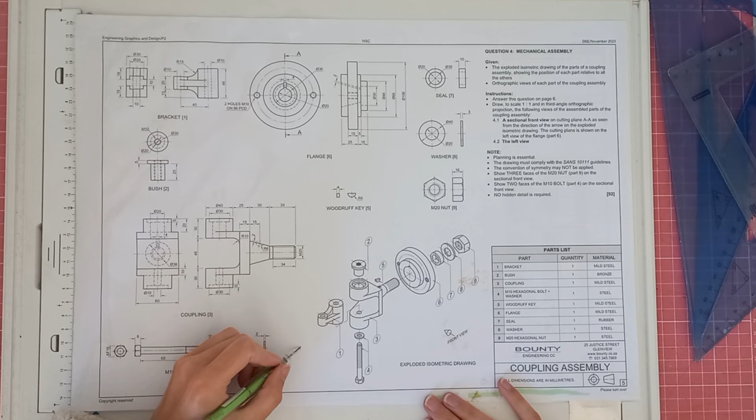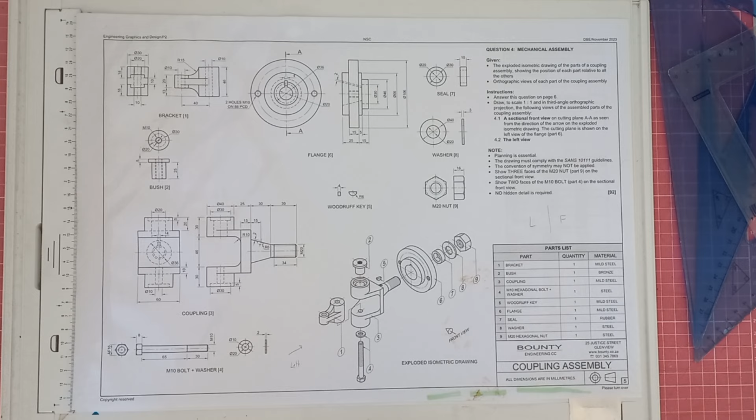And when we draw that on our paper, we're going to have the front and the left on the side over here. So let's just have a look. See, there's quite a lot going on. I'm just trying to think if it would be easier to start by drawing the left view so we get that bit in, and then we can draw in the rest, which I think is going to be the most sensible. Okay, we're going to start by drawing in the left view.

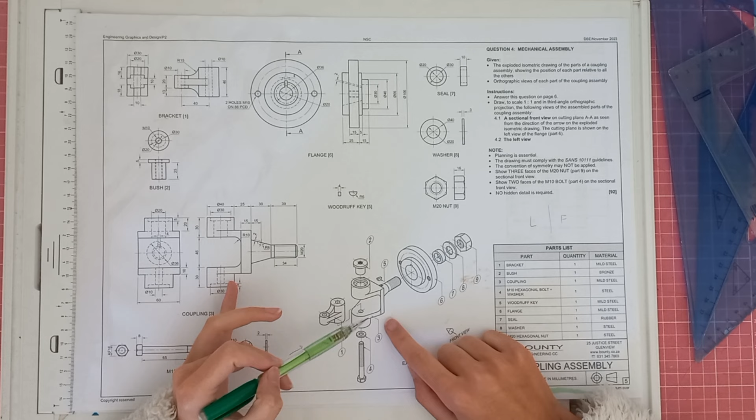So first things first, we can see that you won't see a lot of what's going on behind the left view. For instance, you will not see this nut, this washer, this seal; you will see part of this here; you will not see the key or this thread here, but you will see what's in front here and what's on top over here. Actually, it slides right in, so you won't see that, you'll just see this here. You will see part of this here, which is the bolt and washer. You won't see the washer though, and you will see the bracket.

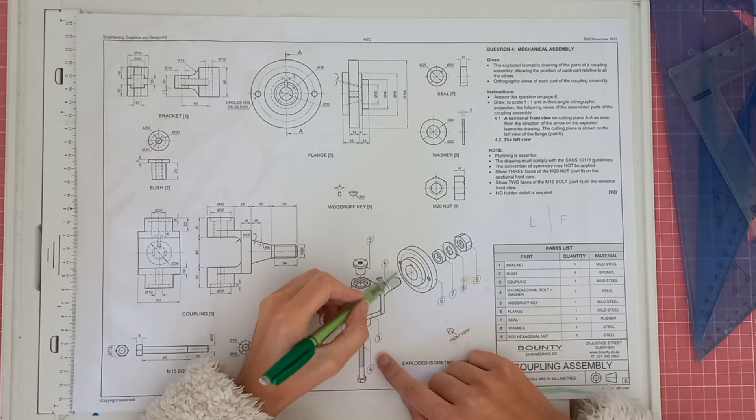Okay, so let's get started. We're going to start off by just drawing an outline for the circle here so that we know how big it's going to be. Because we know our left view is going to have to be on the left side of the paper, apologies, I've messed on my paper so it's a bit crinkled. We're going to just start by drawing in our center lines.

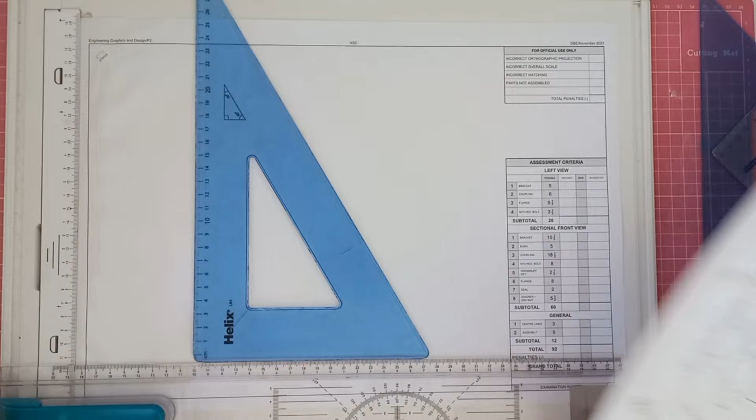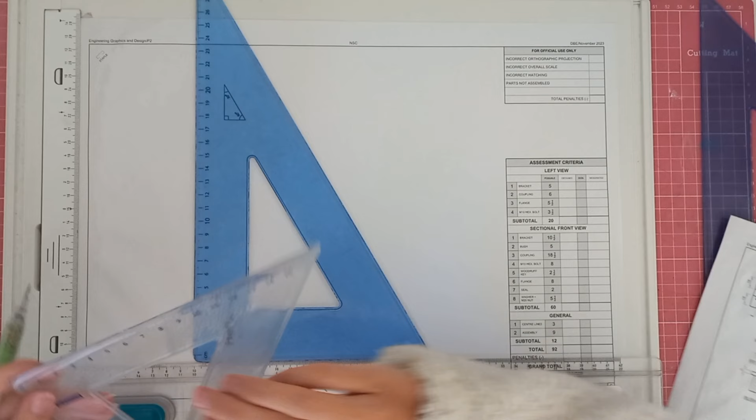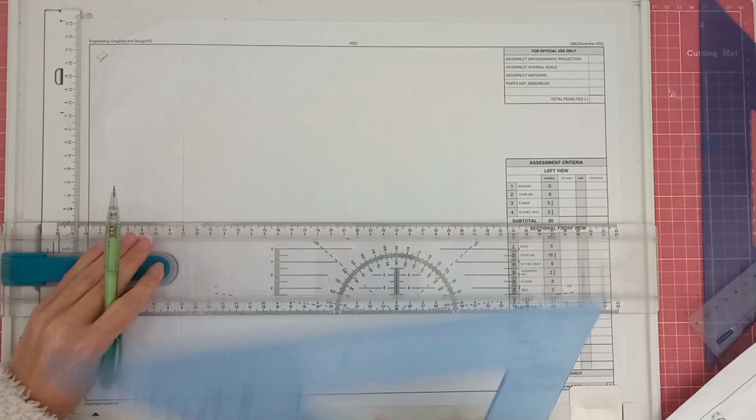I don't imagine that it's going to be too big, because if you're looking at the circle here, the diameter is 106. So if we take half of 106, that's 53. So we're going to leave about enough space for 53 to work. We could essentially start here even. The reason we're doing this is to plan our paper, to make sure that we do not have cramped drawings, otherwise you're going to have to restart your whole mechanical assembly, and that's not always a good thing.

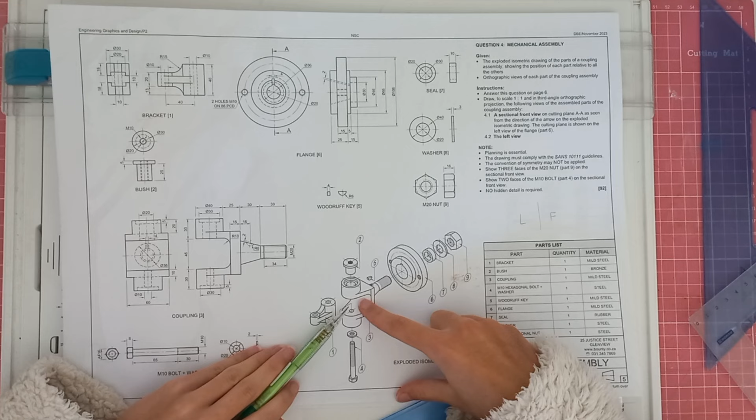So we're going to just start off by drawing that, and then we can get cracking on the rest. We're going to start with this bit here, which we can see slides in the center of this here. We will obviously see part of it on top here, so it's going to slide into this area here.

Sorry guys if I'm just a little bit not making sense. It will make sense. I'm also just trying to get this into my brain.

Okay, so we're going to draw it in here first. We're going to find the center point, which we can see would be right in the middle here, and we're basically going to draw this.

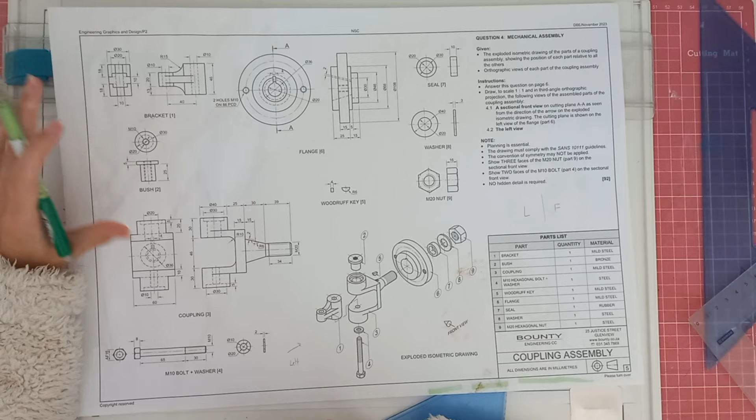We obviously do not have to cut this view, which is a nice thing. So we're going to start off with our diameter of 30, which will give us 15 and 15 on either side, and we'll have a line here, as well as a line over here.

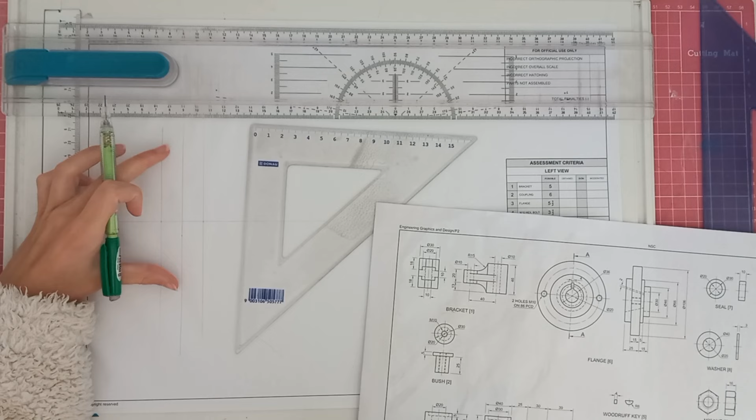Okay, then we will have the total height of it, which will be 46. So that would be, because it goes in the middle, it will be 23, 23. 23, 46. Perfect. Okay, then we've got a line there, followed by a line here.

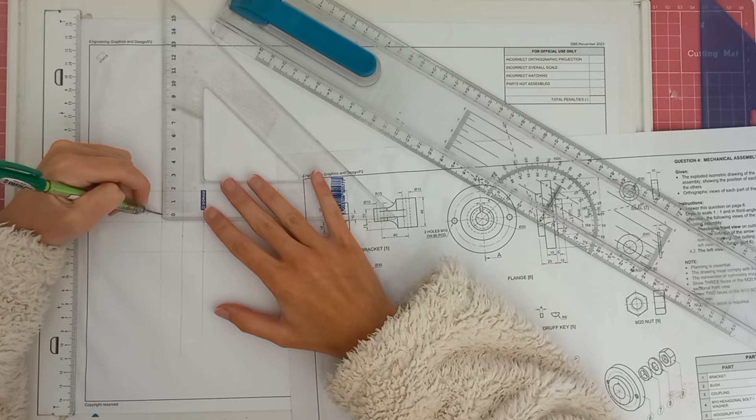Okay, so we've basically drawn in the exterior shape of it, as you can see, just to sort of help us get started. Now we obviously want to draw in this square here, so we're going to start off by getting these sides, which will be 18 down, 18 up. So we're going to measure 18, and then we're going to measure 18 as well. Okay, and then if you can't see the points, I'm sorry, I'm going to draw the lines in now so that you can see.

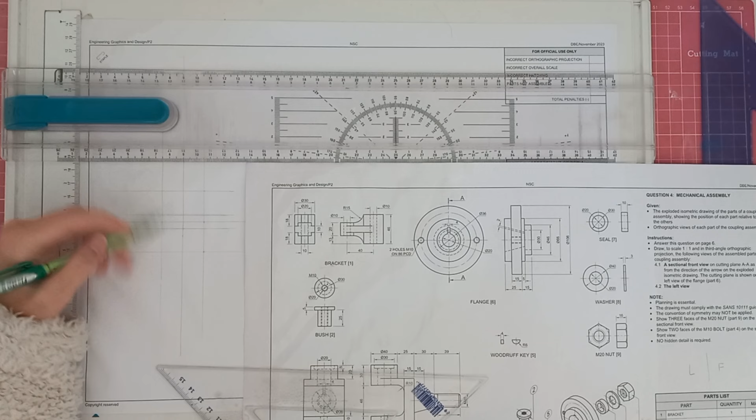So that will be over there. That will be over there. I just hope that's not skew. Okay, that's straight. And this middle line. Okay. It looks skewed to me, but it's probably because my paper's crinkled, because it's measuring correctly.

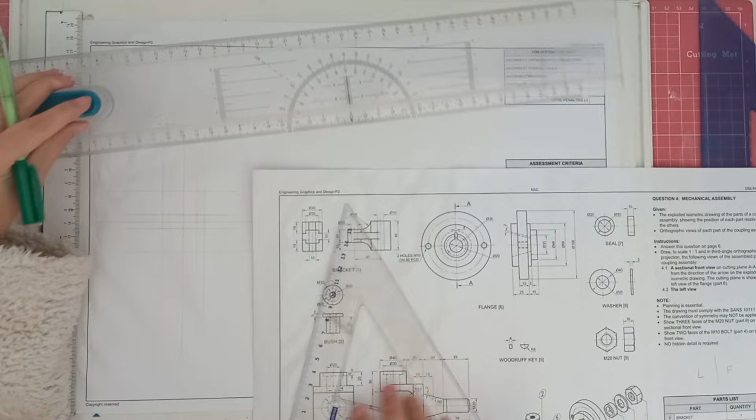Then we've got 20 in the middle here, so we're going to grab those lines quickly. So we're obviously going to measure 10 and 10. So we've got 10 over here, 10 over here, and then this whole height of this here will be 20. So again, we'll have 10 and 10. So there's a lot of lines here, so it's important that you don't lose your lines. Okay, so 10 and 10.

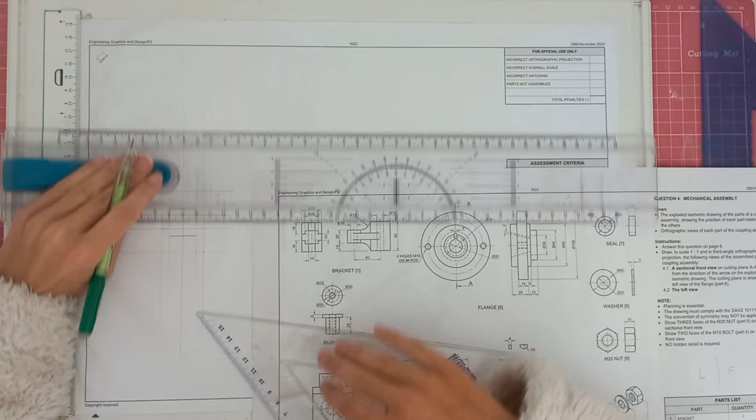Okay, so once you've got those lines in, you can draw them in solid. So we've got a line going here, as well as a line going here. Okay, and then we've got a line going here, here, here, and here. And then we've got these edges that we can now fill in. So we will have a line here and a line here, as well as a line here and here. Okay, there we go. Let me just fill in these lines because mine are a little bit short.

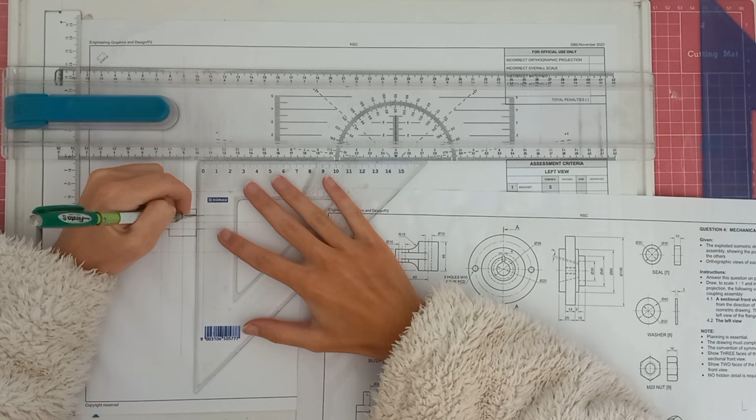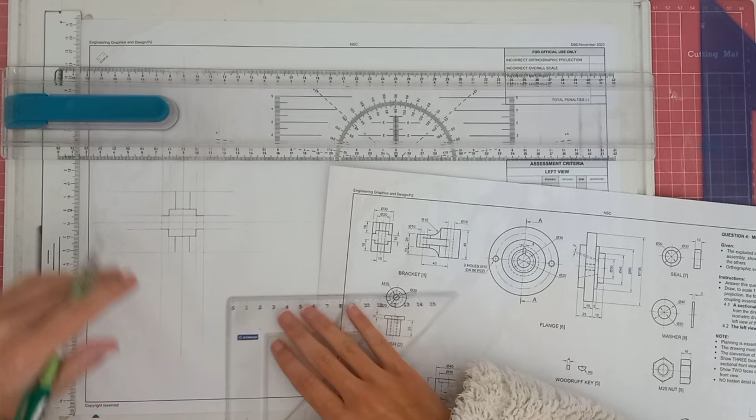Okay, so now that we've got that in, we're going to do the 10 in the middle. So we've got 10, 10. And then we're going to bring those lines up. Okay, we've obviously measured 5, 5 on either side to get it correctly. And then we can draw essentially everything going straight around it.

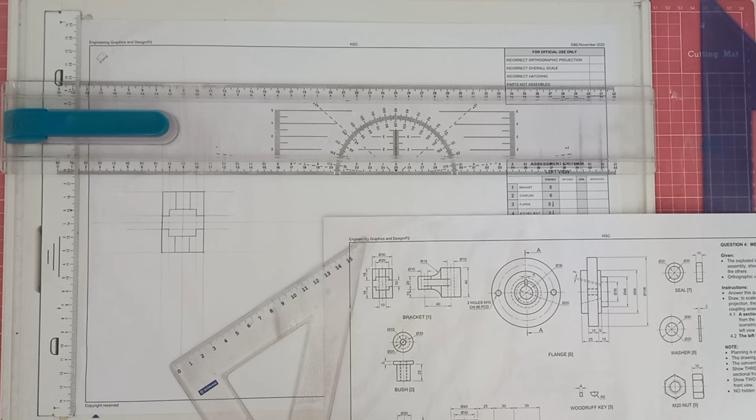So that will be there. We will have this here as well. And then we'll have the edges over here as well. Okay, so it should look like this. You can obviously see it looks very nice and very simple so far.

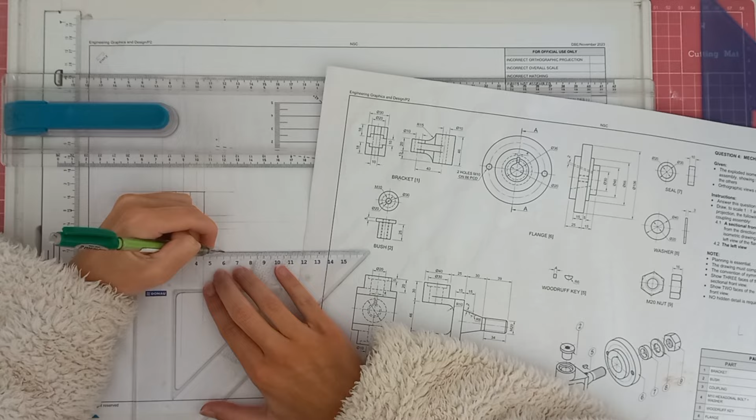Okay, now we obviously want to put the coupling around that, which we will only see parts of, because this is very small in comparison to the coupling. So using these same lines that we've got here, we're going to get a measurement of 60. So we're going to measure 30 and 30 on either side. Then we've got there. And then what we can do is we can just bring that as a solid line going up, up at this point here, and up at this point here as well. Okay, perfect. So it should look like this.

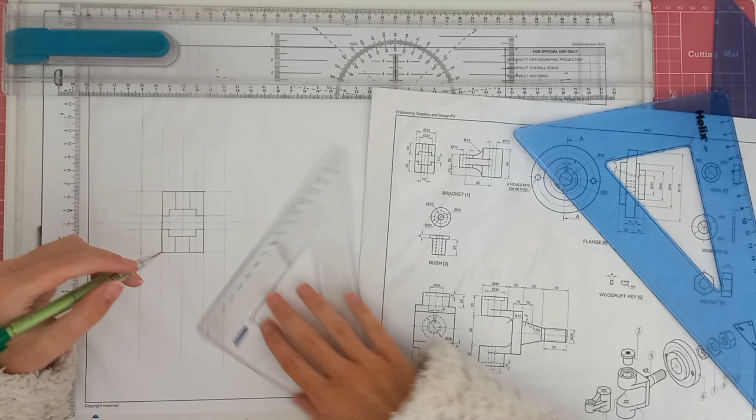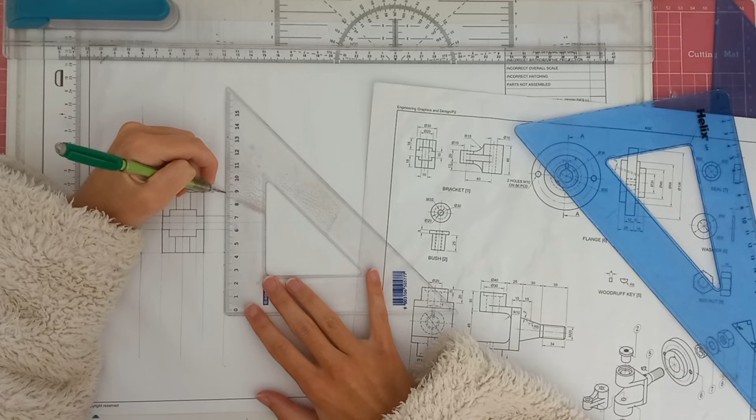Followed by that, we're going to have a thickness of 10, and we'll obviously have, from what it seems like, symmetry. So we should have 10 there as well. That will be a measurement of 20, and this will be a measurement of 20. So you could measure 30 and then just have your measurements of 10 and 20. Okay, let's see that we've got 10 and 20. And then we can bring those lines across as light little construction lines quickly.

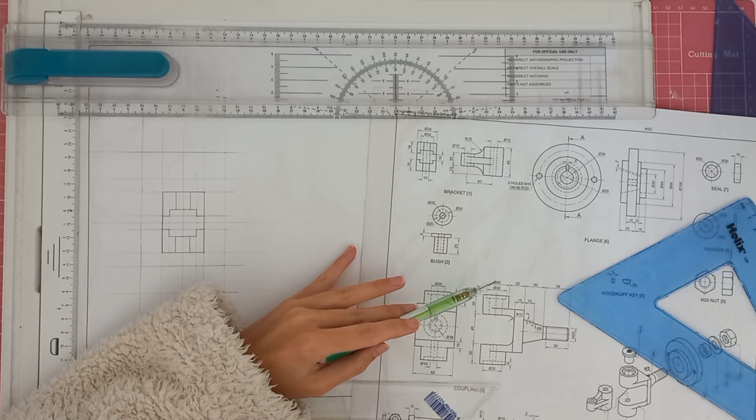Okay, perfect. So it should look like this so far. Okay, have we got the complete thickness here? Yes, we do. So this is a measurement of 40, so we're going to measure 20 and 20 on either side. So that's 20 and that's 20. And we could bring that straight down.

This paper's honestly driving me crazy because it's lifting up the ruler, which is making everything go skew. But I only have myself to blame.

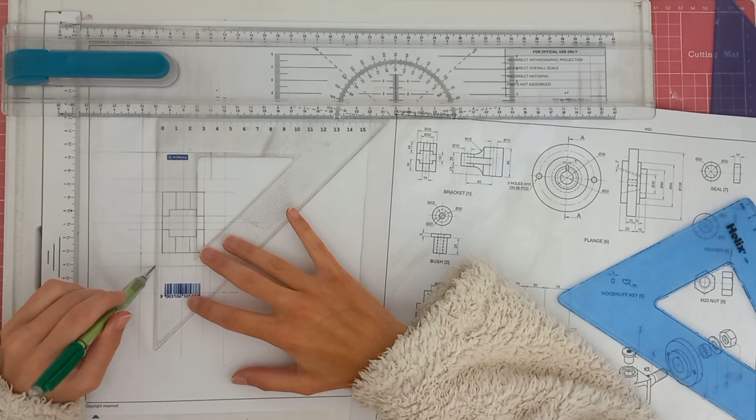Then we're going to draw in those 40 lines, just like this over here. Okay, and then we won't see anything else apart from that. So we can basically draw this in because we thankfully are not cutting this view. So this one is going to be very easy to draw in. Normally I prefer to start with the view that we section, and that's just based on the fact that most of the marks lie there.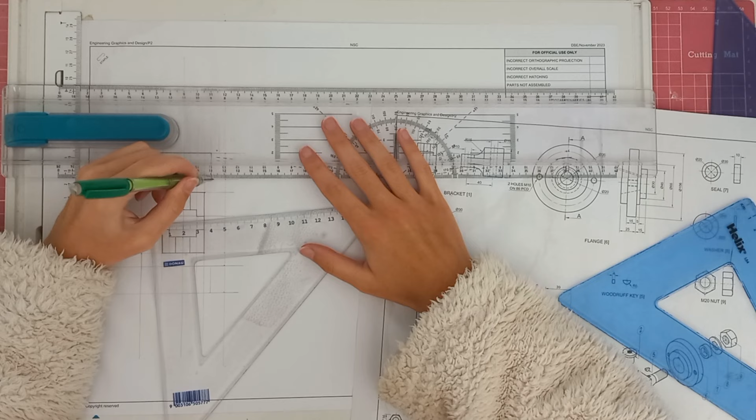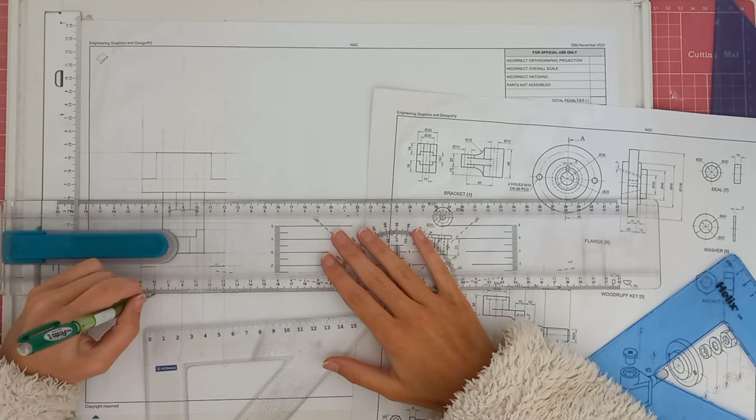But if you really struggle with visualizing the mechanical assembly and you just want to score as many marks as you can, sometimes it's easier just to draw in the view that doesn't get cut because there's less parts to draw, less detail. And if you're really struggling and that's all you want to do, then that's what I would recommend. Obviously I would recommend overall that you do complete everything, but this is just if you don't want to do the whole mechanical assembly, or you get stuck and you want to score marks. This is the view to do it.

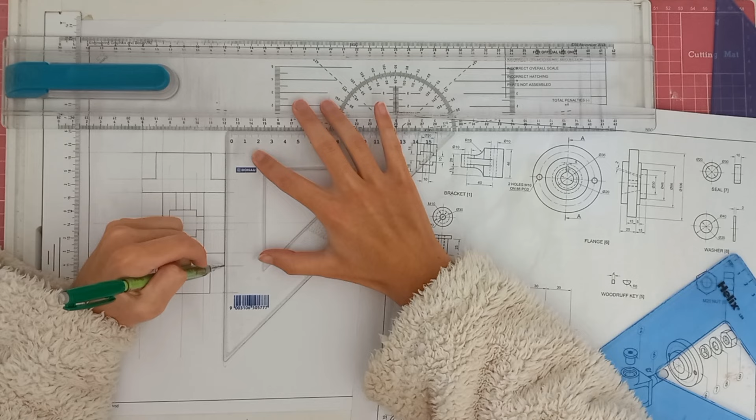Okay, so now we've got these in, and then we've obviously got a line that's going to go straight at the edge. See, this ruler is driving me crazy. We're going to draw this line in here and this line in here as well. Okay, so this is what you should have. All right, then the rest is going to be really simple if you actually think about it, because we've really just got the circle that you're going to see. You've got that little part there and obviously the circle.

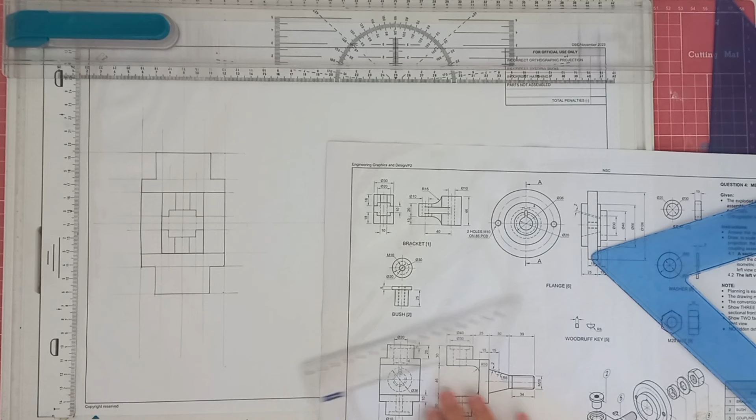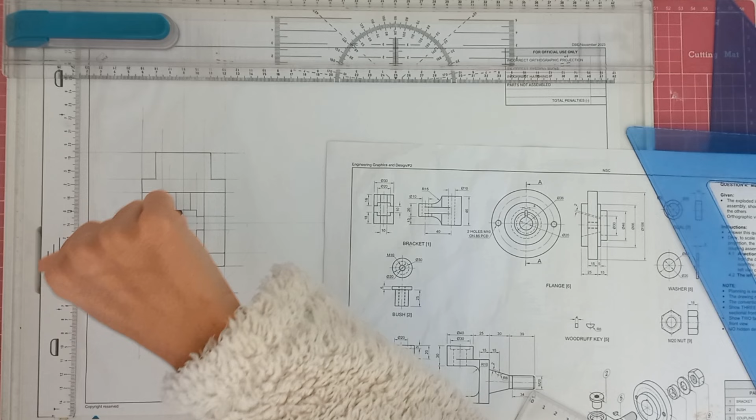So let's draw in the circle because I think it will be one of the easier ones to do at the moment. So we said that half of 106 is 53. So you're going to take a measurement of 53 on your compass. You're going to find your center point, and from that point you are going to draw a circle going around. Obviously it will be covered by some parts, so around those parts you will make it darker.

My lead is not the same as the one in my pencil, so it's a bit lighter, you can see, so I really have to work hard to get it the same. So hopefully you guys do have the same lead, just so that when you draw it makes things easier for you. Okay, that should do well for now.

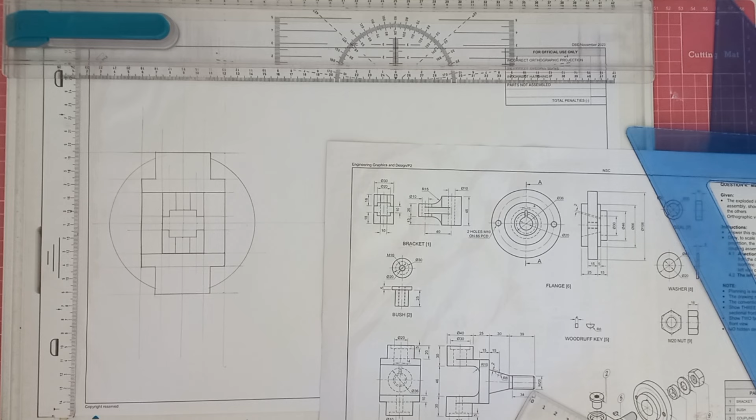Okay, so from that point there, your center line should also be a long line and a short line, going through the middle here. I didn't do that because I find it easier to draw the drawing with the full line. So I would advise that you do what's best for you first and then go ahead and put your center lines in correctly.

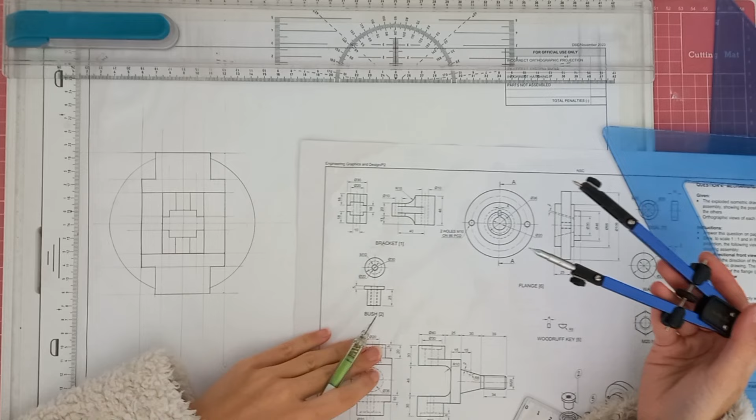But what we're going to do now is get the center line for the circle over here, which, looking at the measurements, looks like a diameter of 66. There is one way to check, and that is to measure with your ruler. So that's not correct. So now we've got to see. Oh, okay, there we go. It says 86 pitch circle diameter, which means the diameter of this circle is 86. So we divide that by 2 to get 43.

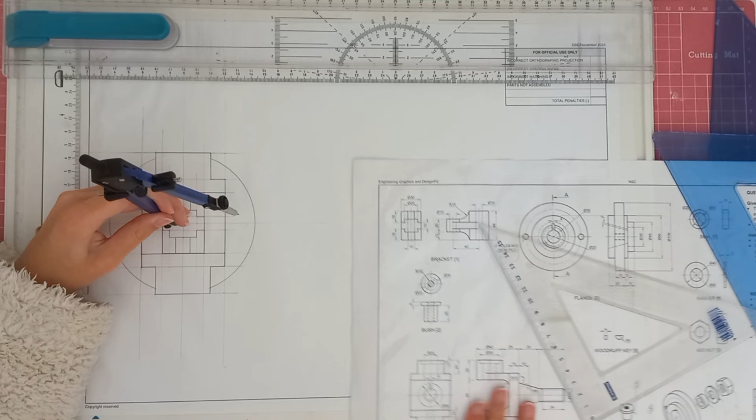So again, I'm going to reiterate the importance of making sure you read through everything. That way you do not lose marks by not reading. And also, if you do get confused, draw lines across that line up with each other. It will help you see which measurement matches to which measurement, which is another way to help you as well.

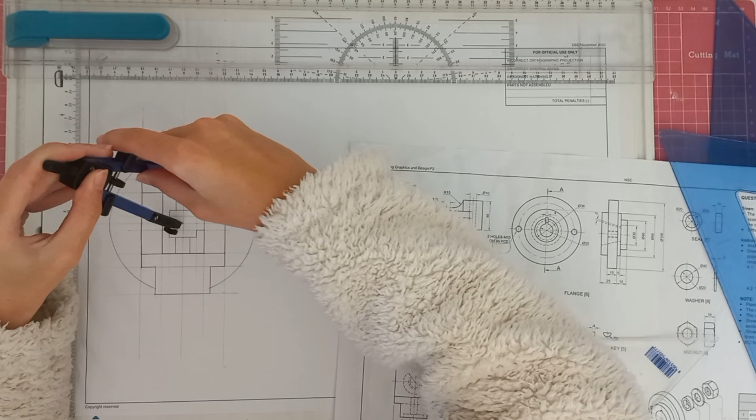Okay, now I'm going to go ahead and start with the long line, short line, despite the fact that it's going to be a little bit tricky. Okay, you will obviously draw this through everything else. Okay.

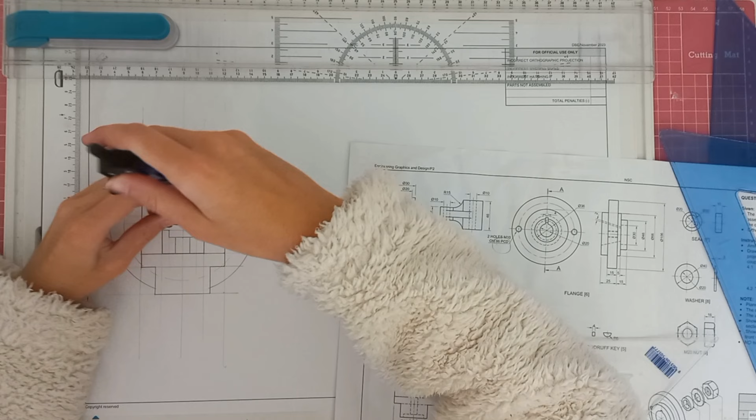Just like this up here. Okay. And I think let's just make that one a little bit bigger. Okay. So it should look something like this now.

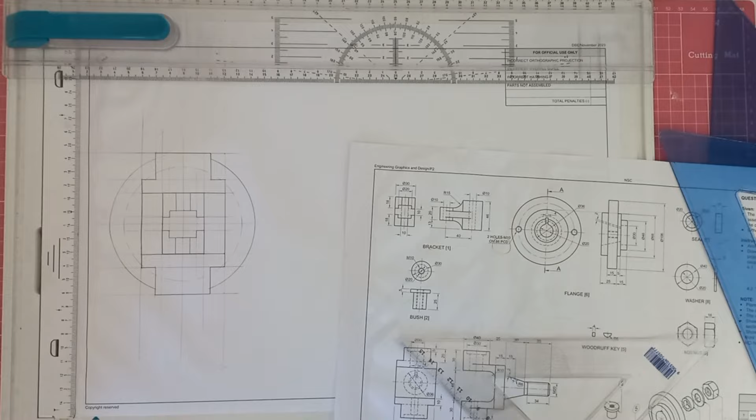Okay. What we're then going to do is we're going to draw in these two holes here, which we have been given as M10. I'm going to grab my circle template for this quickly, just because I think that's going to be a lot easier to draw it. And then we're going to continue. Okay. M10, so I'm going to find 10 on the circle template.

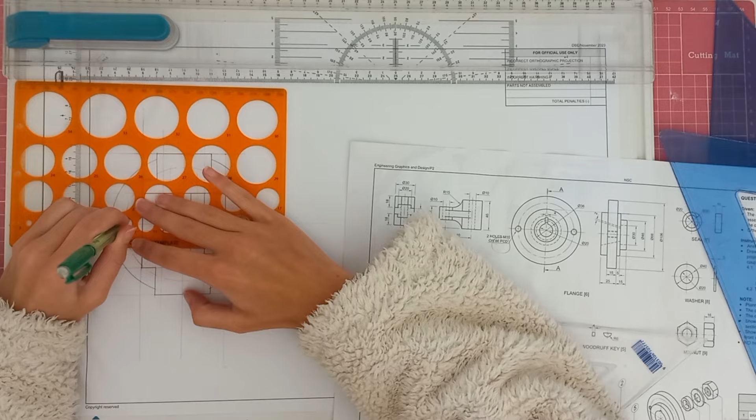Obviously, in this case, you would just use your compass, but like I say, I find it easier to use a circle template for such small circles. So that would be my advice to you, is to use your circle template. Okay, there we go. So you should have something that looks like this so far. Just keep in mind my circle line weights are not the same as everything else, which is not great for me. So make sure that all of your line weights look the same.

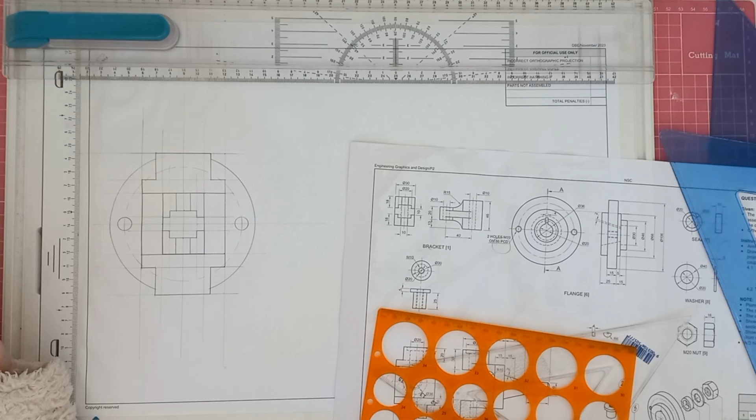Okay, we also can't forget about the circle going around it, which, if I'm wrong, correct me, but I'm going to just assume here that it's like a millimeter difference. So that would give 11. Okay, that actually seems a bit small. Okay, I'm going to do 12.

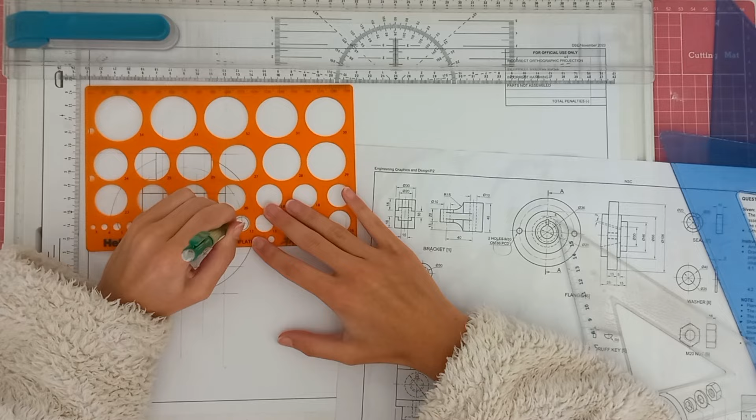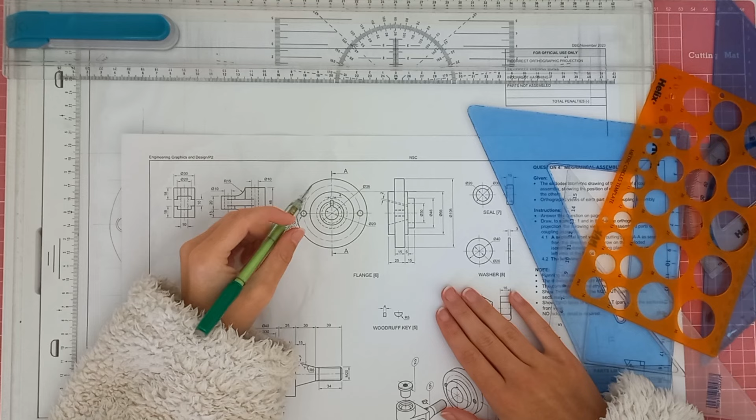Okay, but correct me if I'm wrong, but you do need to have a circle going around like that. Okay, and then we'll do the same on the side here, like that. All right, and then we can't forget the last bit of the drawing. Actually, there's something I missed, is this measurement here. We will see part of it. Okay, and even if you're not 100% sure, it's always good to check.

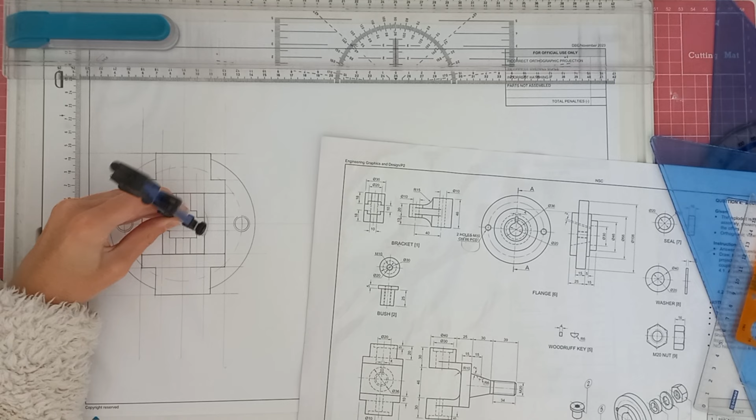So diameter 36, if we had to halve that, it would be 18. 36. Yeah, okay, so we're going to grab 18, and then what we're going to do is we're going to draw in just what you will see on the sides. Okay, but you won't see that on the sides.

You can tell that I should film these videos in advance because I'm not really using my brain at full capacity so early in the morning, am I? Okay, let me not complain though, because I know you guys are writing.

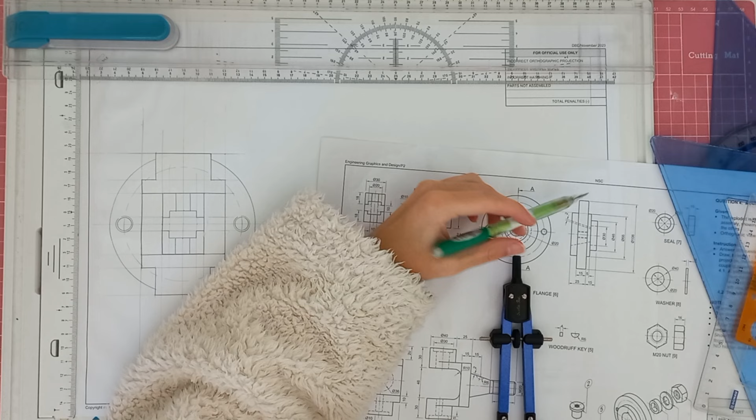It's this one here that I'm talking about, which is the diameter of 66, so that gives us 33. And there we draw. No, man.

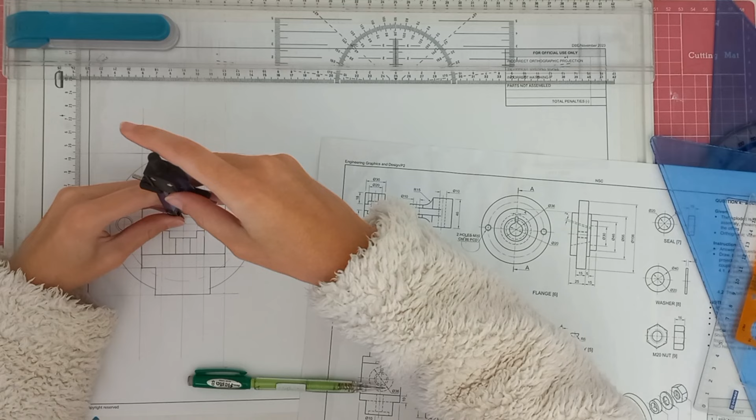Okay, there we go. I think what it boils down to is that everyone's tired at this time of the year, and everyone just needs a holiday and a break from all of this. So I can imagine what you matrics are feeling like, writing the way you guys have been doing. So I'm sure you can relate.

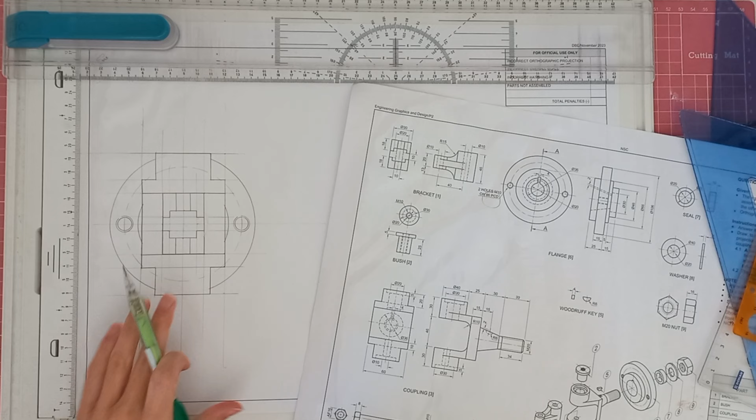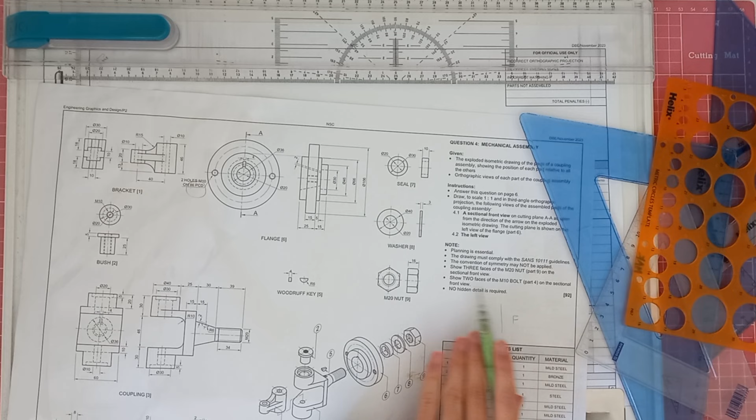Okay, so now we're going to do the next part, which is the bolts, which are going to stick out over here. They give us the across flats value, which means that from this point to this point, we've got 16. And they obviously do say here: show two faces of the M10 bolt on a sectional front view. Okay, we're not doing the front view. What am I doing on the sectional front view?

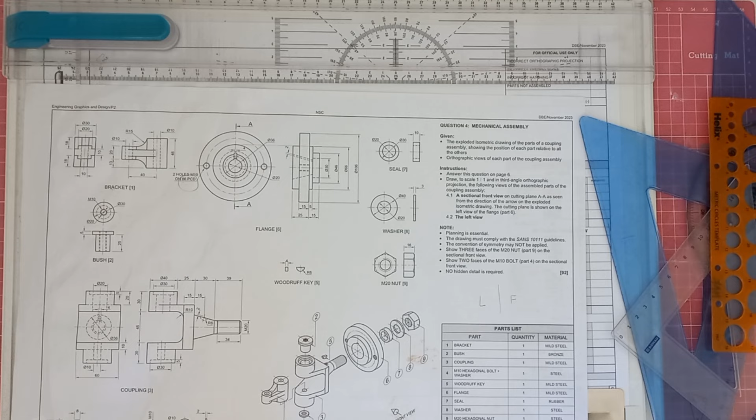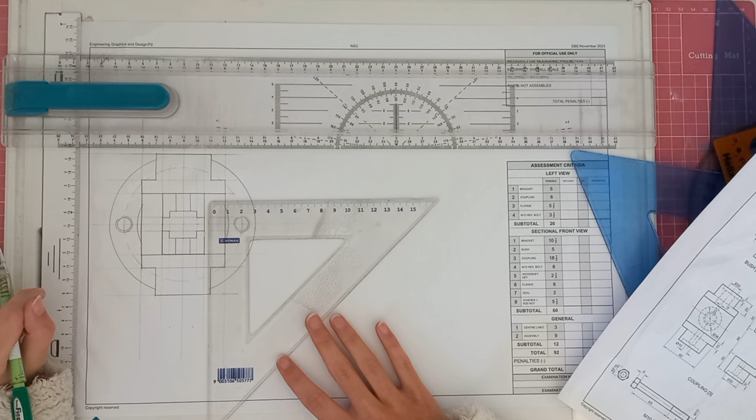I'm getting irritated with myself actually. Okay, so we're showing 3 faces here because it's not part 9, it's part 4. So we're going to be showing the 3 faces.

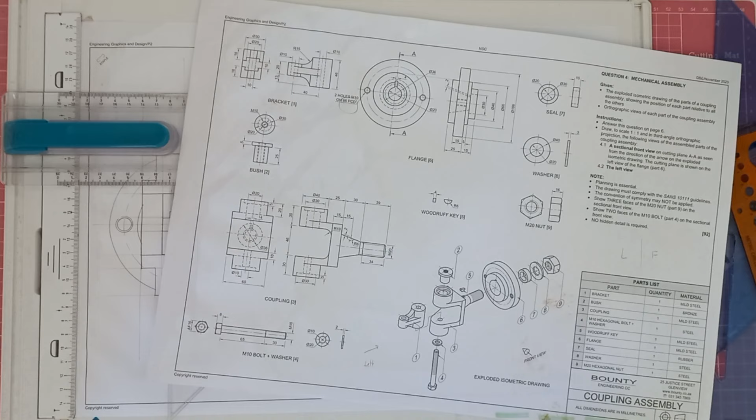Okay, let me just take a little breather and then I'm going to come back so that I can actually focus and stop mucking around. Okay, hopefully this time I don't muck around.

Okay, so we were busy with the bolts. So now where's my pencil? Oh my gosh, you're kidding me. Okay, so we've got obviously the 16 measurement here.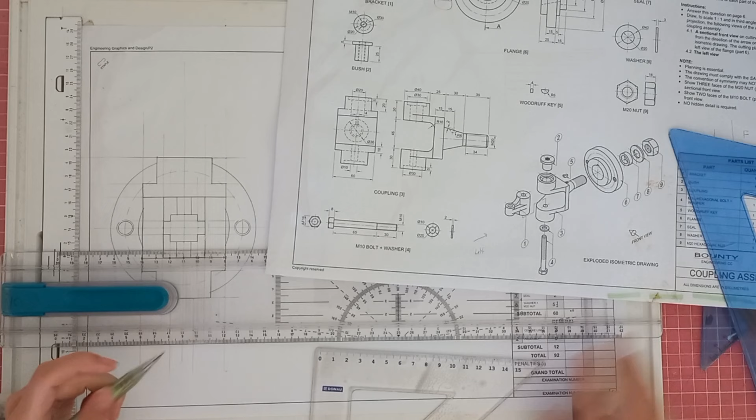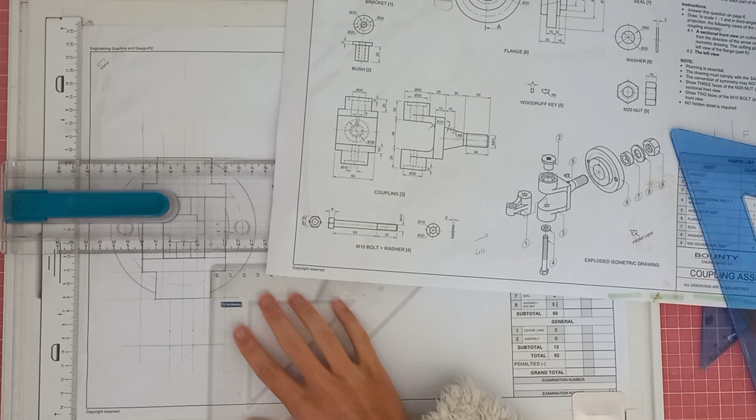So what I'm going to do is I'm going to draw a line at the bottom here, just to give the auxiliary view, just to help out. And because this is across flats, we know it's the length of where the circle is going to be. So I'm going to draw in a circle, which, okay, mine was just slightly off.

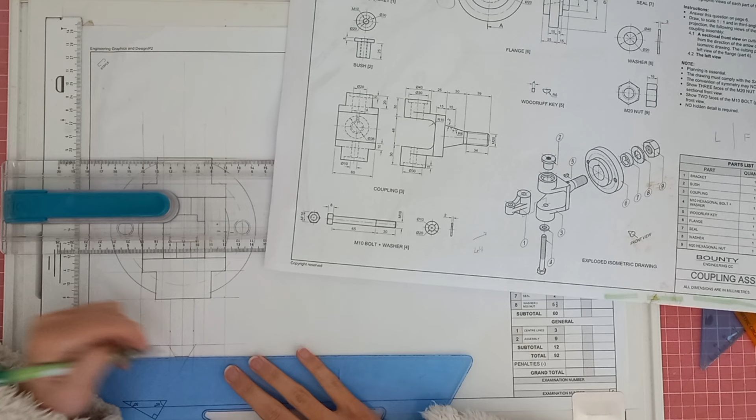Okay, and then what we're going to do is we're going to basically draw in the rest of the top of the bolt. So we've got 60 degrees, 60 degrees, and then 60 degrees going across just like this over here. And then I am just going to make that solid quickly just so that you guys can see nicely. Okay, so there we go.

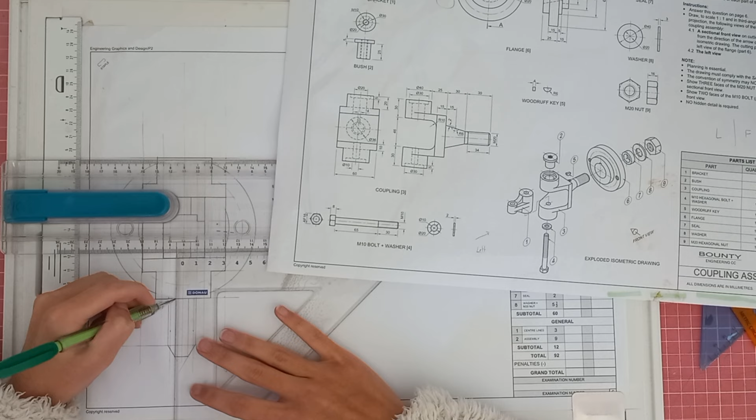Then we're going to bring these lines down because obviously it's going to extend out just a little bit like this and like this. And then we will bring these middle lines down as well. You can see this over here. Okay, and then we're going to take the height of it, which they've given us as 8. So we're going to have 8 and then a line at this point here.

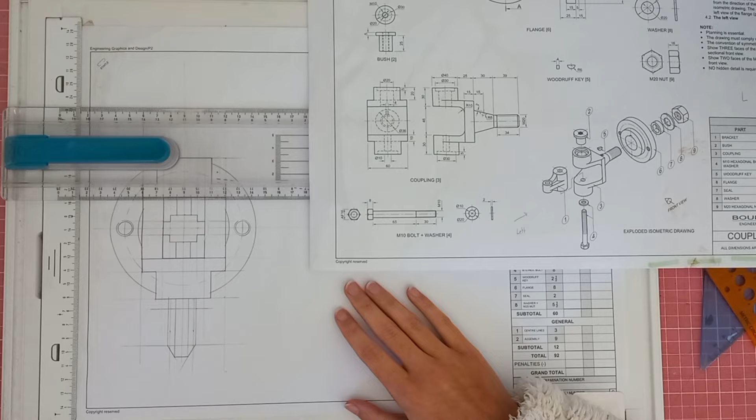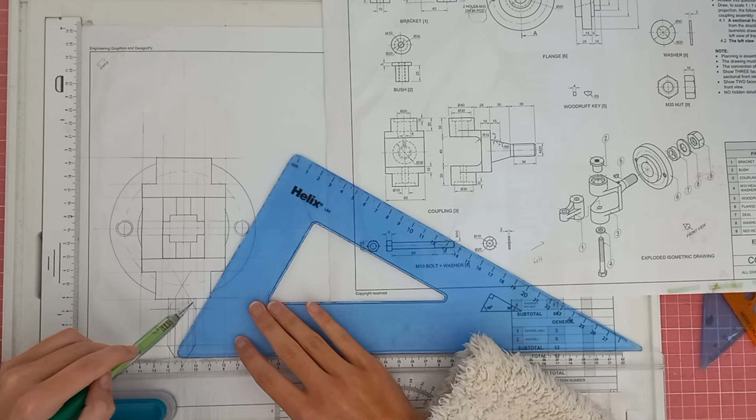Okay, obviously we need to get the curves in. So what we're going to do is we're going to take our 60-degree set square and we're going to draw in a line from this corner going back like that at 60 degrees, a line from this corner going back like that at 60 degrees, and then from this corner we'll have 60 degrees just to that point there, and a line just to that point there.

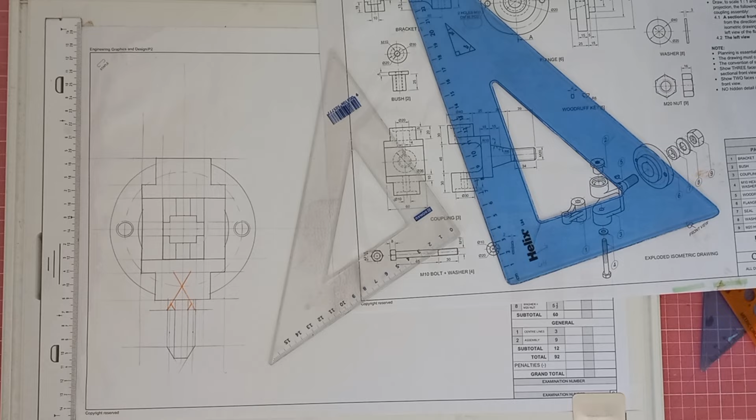Now what I'm going to do is I'm going to grab a highlighter quickly just so I can highlight that so that you can properly see it, and then we're going to continue. Okay, to me it looks like you can see it, so that's great. Okay, so from there we will obviously be drawing in the lines for our curves. So you're going to put your compass at this point, and you're going to make a curve.

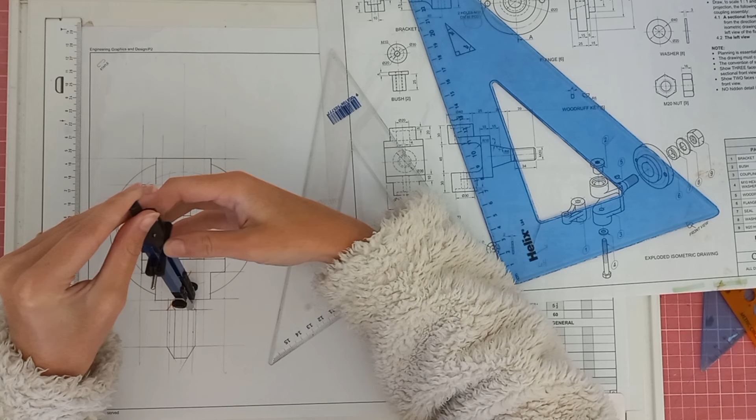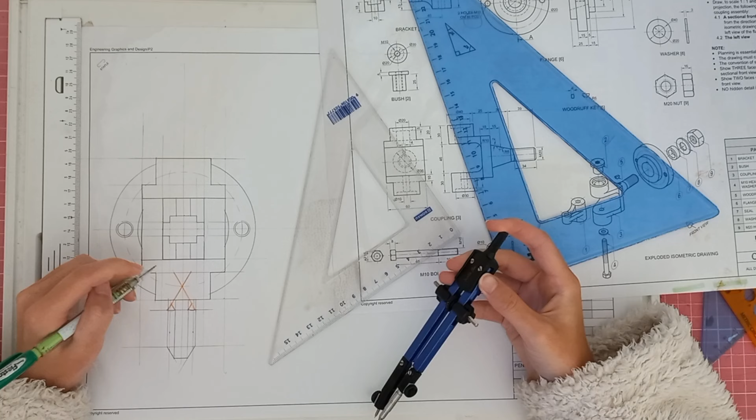This is obviously going to be a little bit tricky given how small the circle is. I'm going to just make it as dark as possible, and then we're going to do the same at this point here, which again is going to be a little bit tricky. Okay, you can kind of see it, but I'm going to go over it with my pencil so that you can see. Do not do this. I'm just doing it so that you can see the points, and then the middle one should be easier because it'll be slightly bigger.

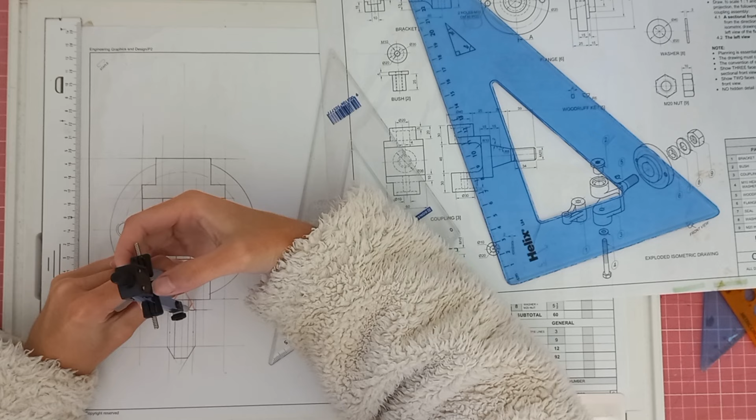So we're going to take that middle point, and then we're going to draw in the top part, which as you can see will be there. Okay, then we are going to draw in the rest of our necessary lines. So, okay, we've got that over there. This will be over here. This will be over here. This will be over here.

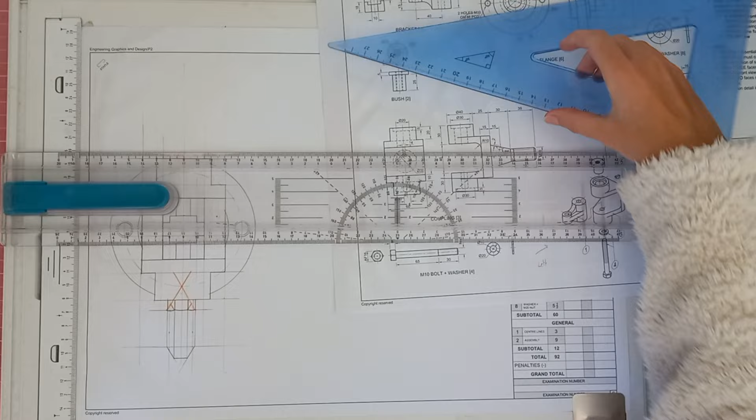And then we're going to take 30 degrees. We're going to draw a line. And 30 degrees, we're going to draw a line. And then it should meet where the top line will be. So that will be this point here. Okay. And that will be your nut done.

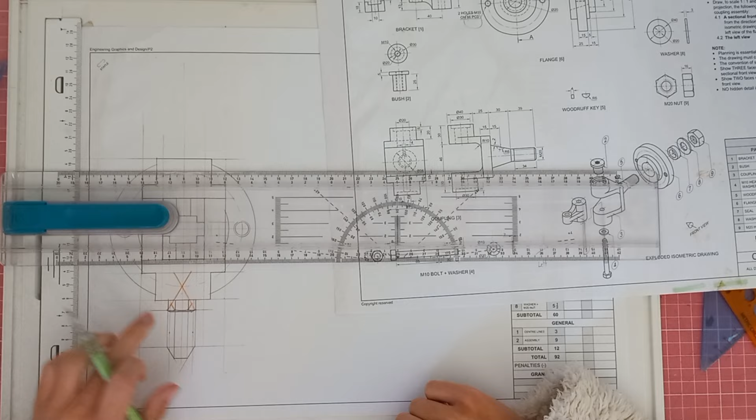It should be on the top of this line here. I don't know why I drew it so high up. So it should realistically be just on top of the nut like that. So ignore the double lines, but there we go. Okay. Then I just want to see, it does not say that you should label anything from what I can see here. So you won't have to label this as your left view. But I hope that this helped you.